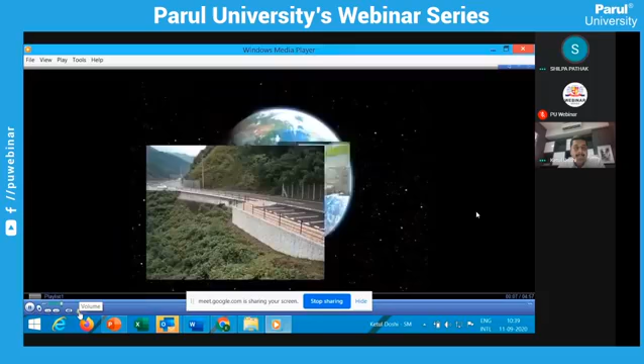Friends, the next video we will be publishing is the pure manufacturing process inside the plant - how the concrete is getting manufactured, how it is being transported, how it is being poured, and how the steam curing is getting done. So we'll see the entire video now.

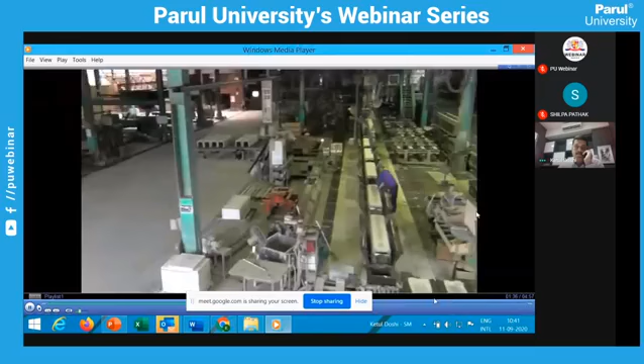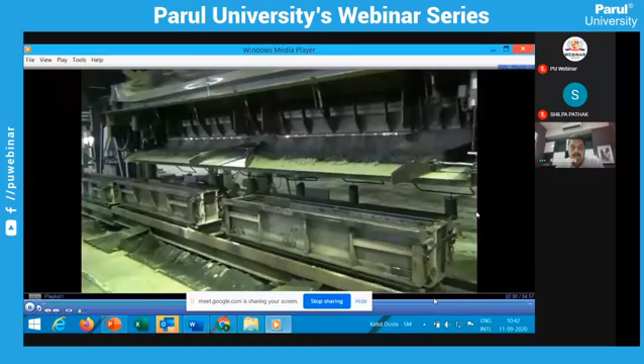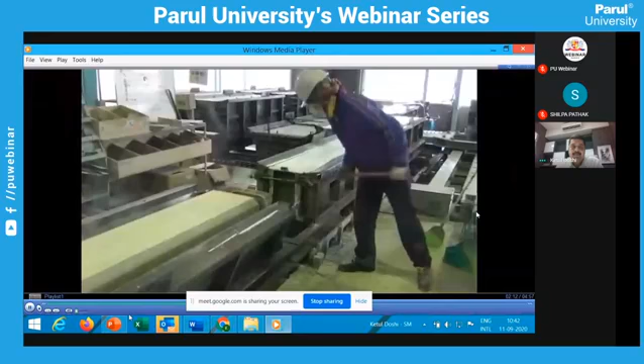This is how the reinforcement cage has been placed inside the mold. Now the concrete is being poured. After pouring the concrete, it is transported to the steam curing chamber. The benefit of doing steam curing is that the concrete will faster develop its strength.

You can see the finishing of the product. It is as good as a glassy finish. So aesthetically, the product will look much better.

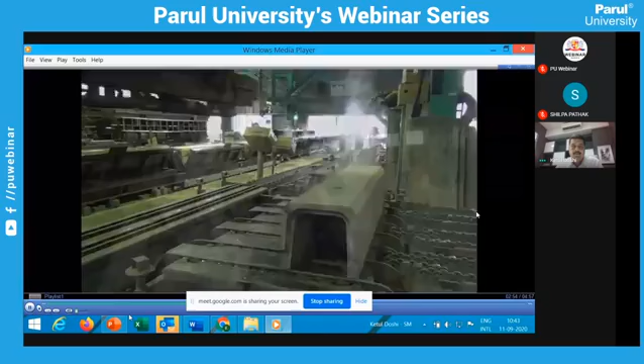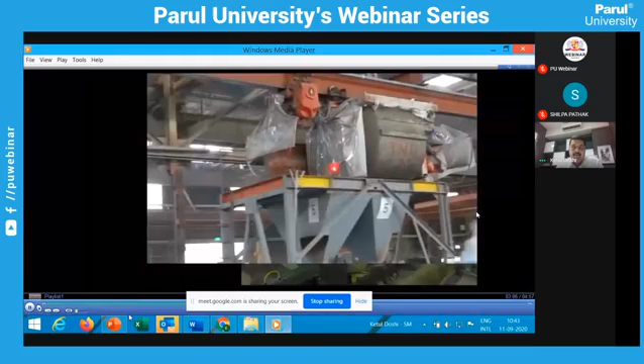These are box culverts, made in a fully controlled automated batching plant. You can see the quality of the concrete - it is totally free flow. We call it self-compacting concrete. No vibration, no compaction is required.

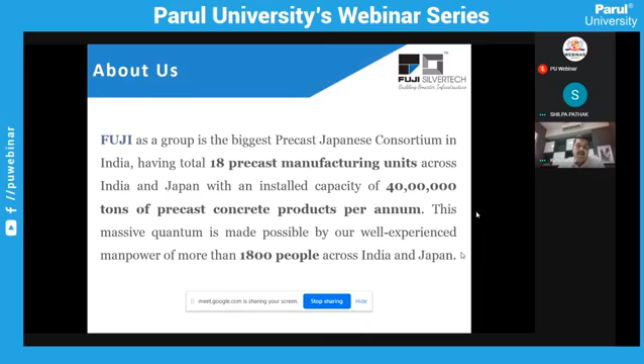Fuji is a consortium of several Japanese producers - Taki, Veda, Fuji. Silvertech is an Indian partner. It is a joint venture between Fuji and Silvertech.

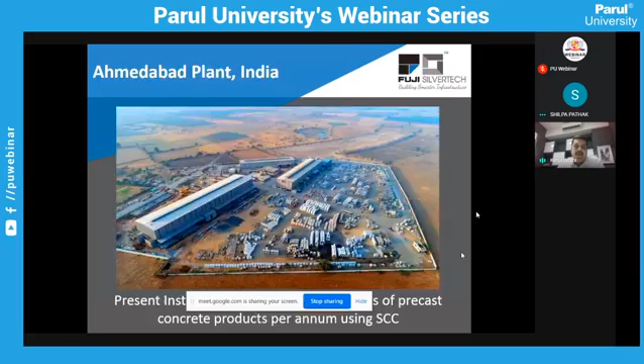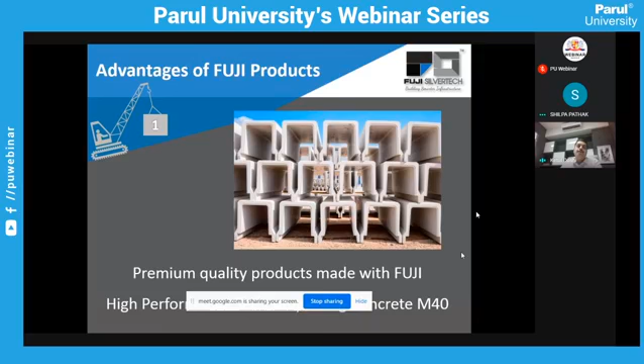The products we manufacture use high performance self-compacting concrete, as mentioned earlier. The grade of concrete is M40, that is cylinder strength. But in India, we use cube strength - the cube strength will be 50 MPa.

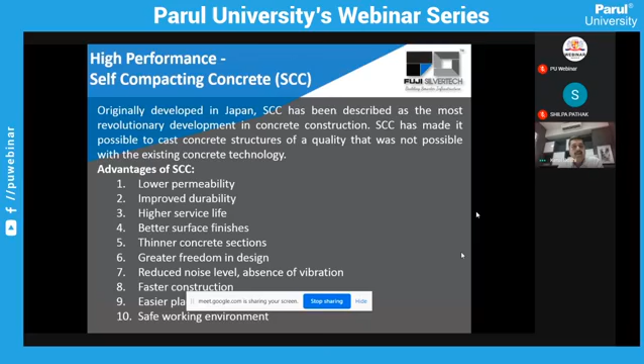Now, the purpose of why we utilize this kind of concrete - the cost of normal concrete versus SCC is almost 25 to 30% higher. But the benefits are there. The advantages with SCC: it gives lower permeability, so no ingress of moisture, chemical or adulterated material will go inside. This improves the durability of the product and gives higher service life. The finishing will be very beautiful - as good as a glassy surface. It will speed up our construction activity as the material is readily dispatchable and installed at the site.

The entire production facility is being controlled by Japanese people. We have a staff of more than 250 Indian people, including ITIs, civil engineers, and diploma engineers who control the entire production, but the entire thing is supervised by Japanese people.

The fourth product is a box culvert. While going on highways, you can see small bridges or minor bridges across the road. These small bridges are manufactured using box culverts. These are ready-made box culverts - you can place the box culvert and the traffic can move on immediately.

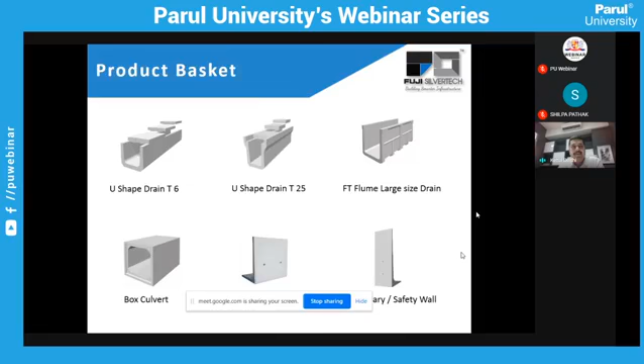Then we have retaining wall and boundary wall. All these products will now be briefly described one by one. The first one is the U-shaped drain T25.

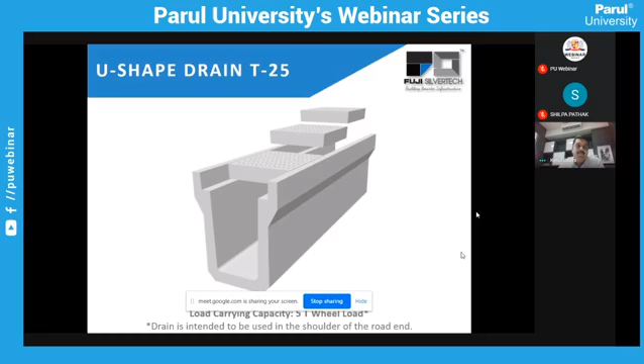This is designed to carry a load carrying capacity of 5 ton wheel load. These are normally placed on the shoulder of the road. This is a load distribution of 25 ton vehicle load, accounting for a 2 axle load, meaning a 10 ton axle load will accompany.

For one axle, there will be two wheels, so one wheel load will be 5 ton. This is a load bearing diagram, and accordingly the reinforcement design is done. The size of the product varies from 300 to 1200, available at every 150 mm gap - 300, 450, 600, and so on.

During manufacturing, I'll brief you regarding the manufacturing activities. We are using single source raw material. At most sites, raw materials vary from batch to batch because of commercial and rate implications. At our place, for the last more than 4.5 years, all raw materials are single source raw material.

Whether it is cement, fine aggregate, coarse aggregate, admixtures that we utilize, or reinforcement, these are all single source raw material, which helps us get a consistent product and product quality to all our customers.

The water that we utilize is RO water - the same RO water that we drink at home. This helps control chloride limitation, because chloride causes corrosion in concrete over a longer period. So small minor points are also taken care of.

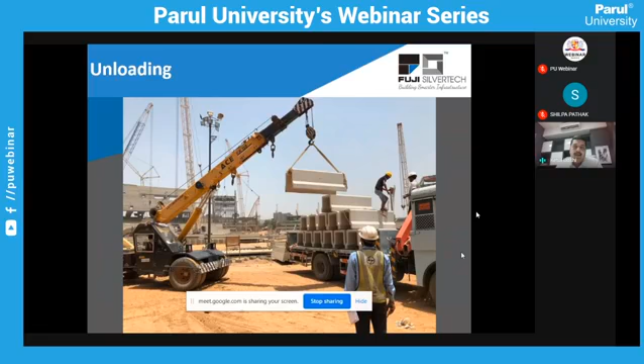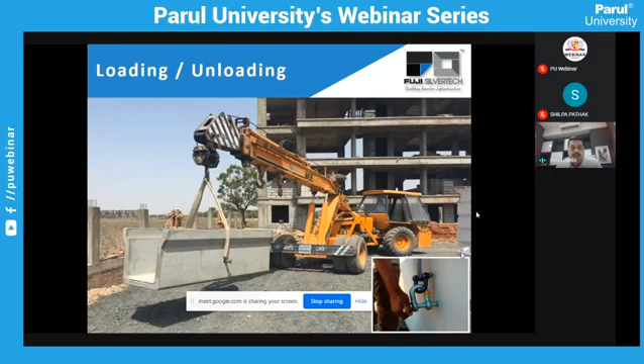This is how, after 14 days of product manufacturing, we transport the product to site. These are unloading patterns. After unloading, we need to place the product at the required location. For that, you can see the D-shackle, a small kind of hook, which is inserted into the product. There are inserts available in every product at the center of gravity where the product remains stable, so the product gets lifted by Hydra.

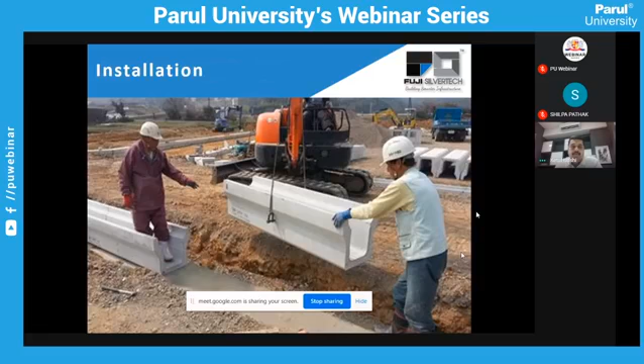This is how it gets placed on the PCC. In precast, joinery mechanism is very important, because at construction site you can see these are all monolithic units, so transfer of stresses is uniform. In precast, this kind of joining mechanism has to be proven, otherwise there is a chance of failure.

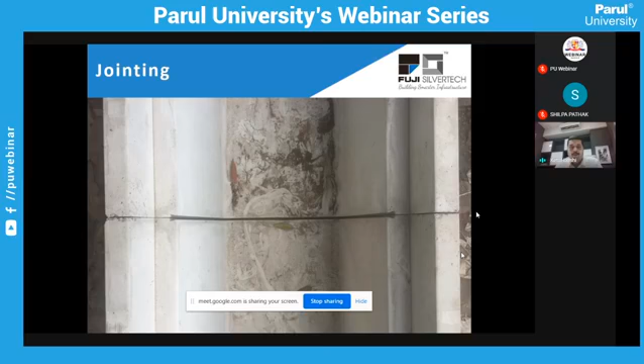This joining mechanism we follow as per Japanese code, JIS - Japanese Industrial Standard - because these products are not yet in the Indian standard. So it is a proven thing, mentioned in their code. This kind of joining mechanism is there - this is the shape you can see, the typical groove. These are to be filled up with cement mortar, normal cement mortar.

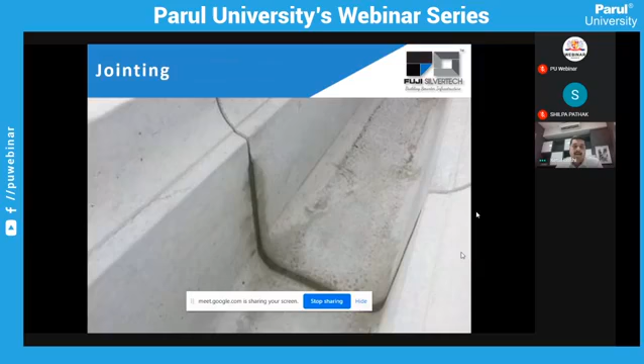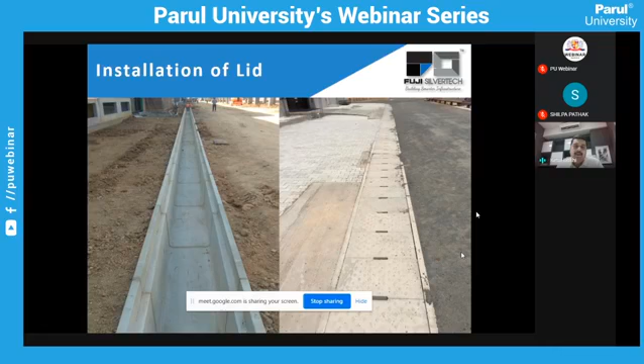The finishing is done. You can see the entire channel is ready. Now what is the difference? If we are going to cast at site, then per day we can cast at least 40 to 50 running meter maximum. If it is precast, then one gang of 4 people and one Hydra can install at least 100 to 120 meter. If I can deploy 3 such teams, we can get 350 to 400 meter every day. So that is the difference.

You can see the finishing of the product. This cannot be achieved at site. The life of the product, you can say more than 50 years. There is no maintenance cost, no spalling of concrete. These are installed products at unit Maruti Suzuki in Gujarat, Bechraji plant.

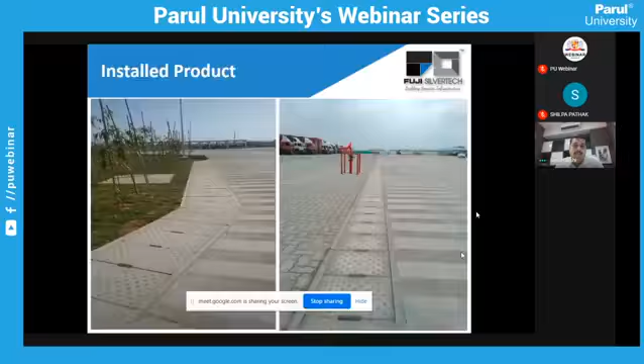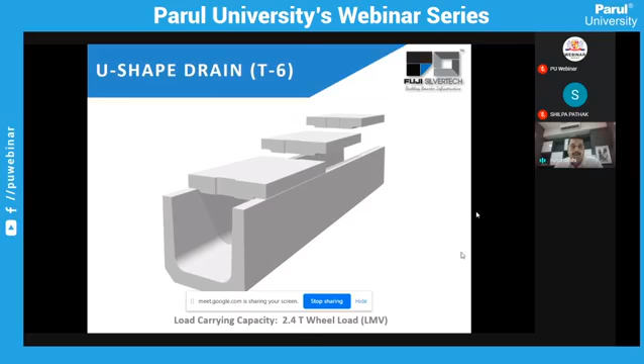These are another variety of drain, T6, same methodology. Many times the drains are installed away from the footpath, where the top surface is used for manual movement, that is pedestrian load. So these are a little bit lighter with low reinforcement. Same size parameters, 300, 450, 600, 750, the same methodology.

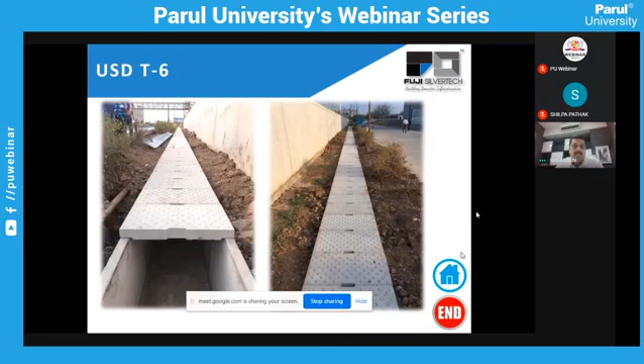Most industrial and government projects are now following this kind of practice. Instead of doing site casting, they just procure these kind of precast products. These are being installed away from the road. This is a photograph of Asahi Glass, near Mehsana.

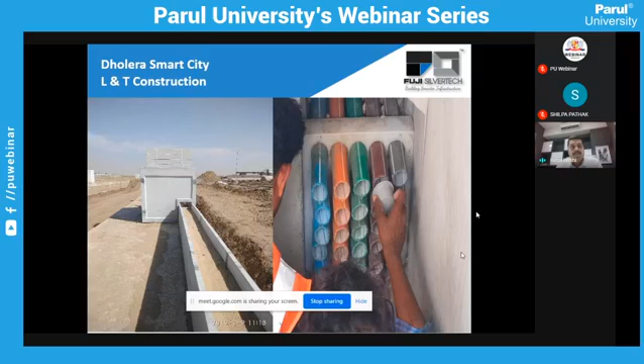These are cable trench. Entire infrastructure activity is almost completed. Most, about 80% of the site, is also completed in terms of roads and infrastructure. It is on the handover.

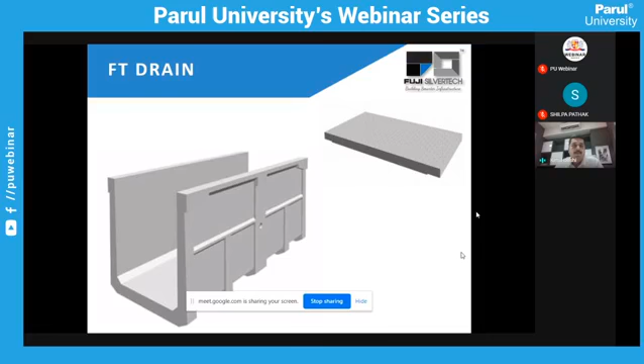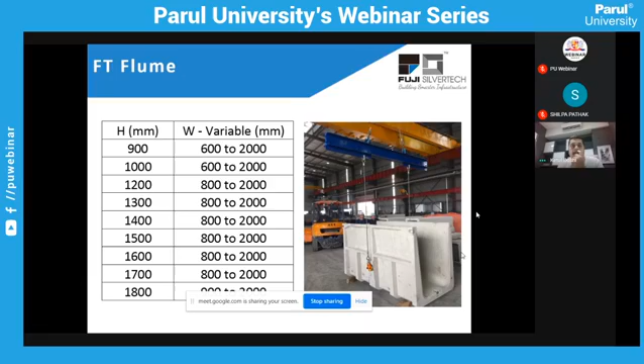If you see the product from an engineering point of view, that is an interesting subject. Most U-shaped trench we have seen is a single type of structure. Now this is a tie kind of structure, a tie beam. The load is getting distributed between column and beams. The rib structure is there, and in between the slab is very thin. So it's a pure engineering product, and the cost complications are very less here.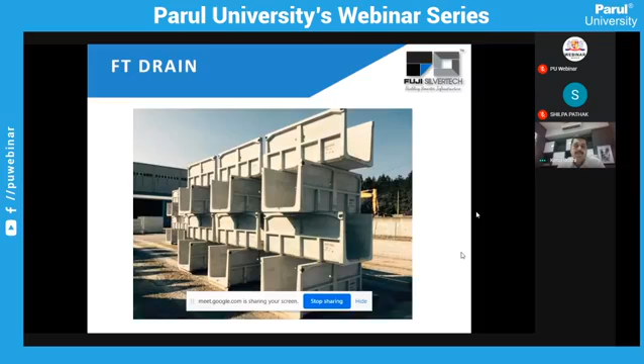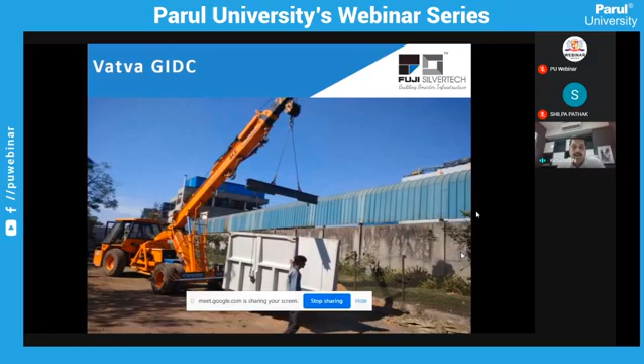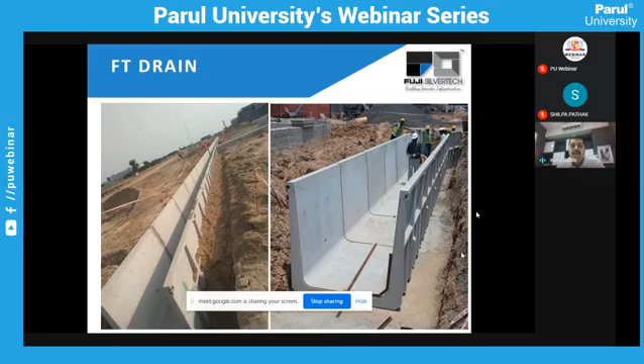On the side of the road, it is being installed. The top surface is designed to take a 4-ton load. How the product is getting unloaded at site, how it is being placed, transported from the stocking yard to installed places—this is the installed product. You can see it's a 1.5 by 1.5 meter size drain. You can see the finishing, line, level, everything in a single line. No segregation of concrete, no kapchi grit is visible.

It's a photograph of Zydus infrastructure. Zydus SEZ is there, second part is coming up in Bavla. There 10 kilometers of such cable trench has been installed.

One industrial unit in Sanand, Secure Meters, where these are being used for cable trenches, and the inside arrangement has been performed by the site people. You can see the person can move inside the trenches for maintenance work of the cable.

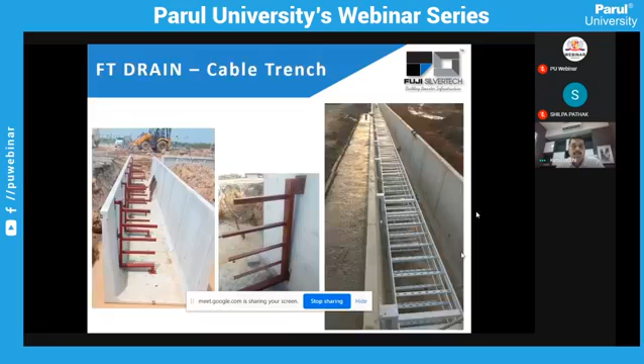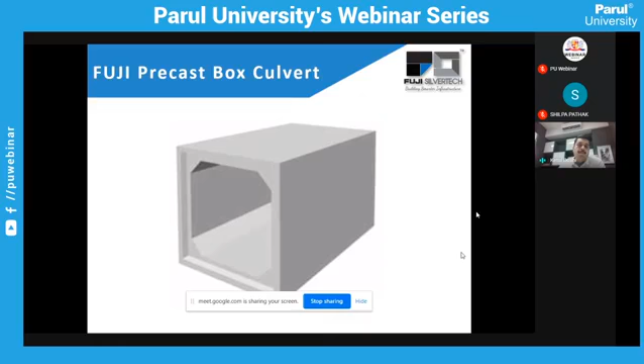Box culvert. Normally box culverts are used at road crossings for heavy traffic movement. Second is for pipe culvert as a replacement of pipe culvert. Third, it is utilized for replacement of minor bridges, with a height of 2 meter or 2.5 meter, these are ready-made box culverts. We are manufacturing the smallest one at 300 by 300, up to 1 meter, 1.5 meter, 2 meter, 2.5 meter. All sizes are available.

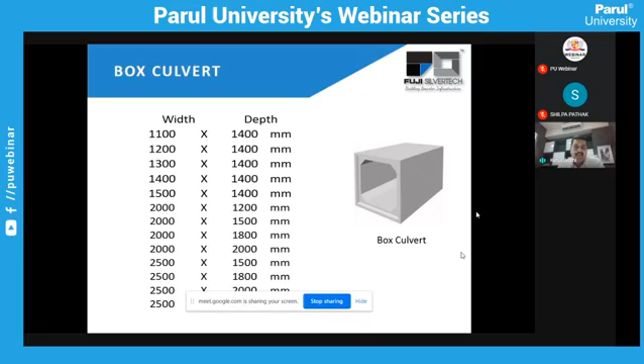This is the actual product. The joinery mechanism—the precast members are manufactured in a very good environment, but the joinery mechanism is also important for transfer of stresses. Now, box culvert is a load-bearing structure. The U-shaped trench, the 3 varieties we have seen, are all non-load-bearing products. No load is coming onto them.

Here the joinery mechanism, you can see it's a male-female groove for proper gripping of the product. That is one. Second, at all 4 corners, the flange plate is available, so these are to be tightened up with nut and bolt. After joining, we can have a grout, and these are to be filled up with cement mortar.

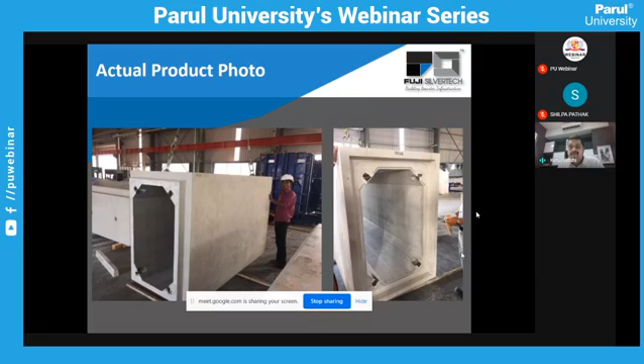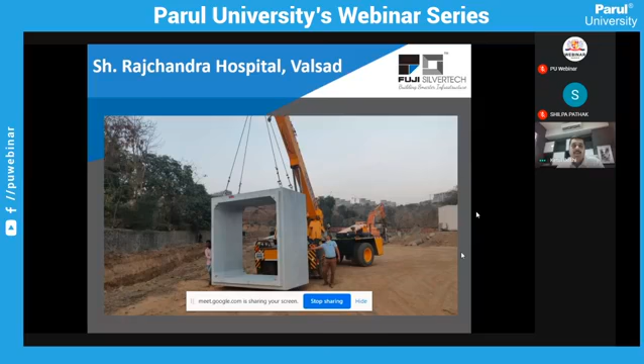This is actual product installed at the site. This is a large size culvert, 2.5 by 2.5 meter. These were utilized as a minor bridge.

We can have inside movement between these 2.5 by 2.5 meter high units. You can see people moving inside. This can be utilized for traffic purposes as well.

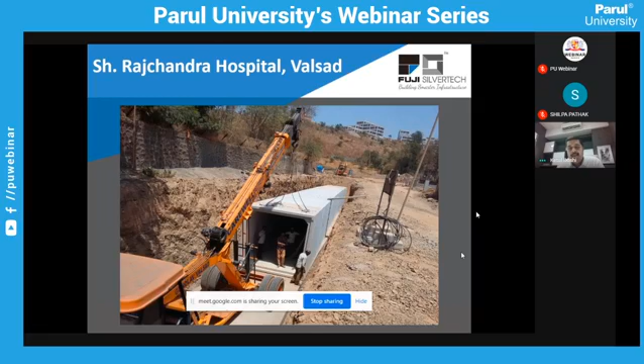Multiple cells we can put. It is the entry gate of the factory and there is a highway. In between that, a small canal is there. So this will work as a small bridge.

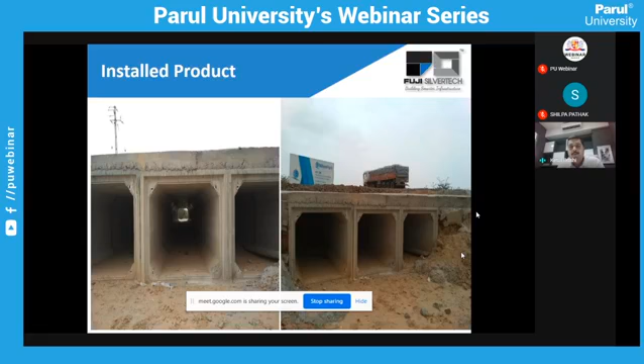Multiple cells we can also put in, adjoining to the box culvert, one over the other. And above that, we can put a small concrete or bitumen layer.

These are earth retaining walls. The walls are being designed to carry a soil burden up to the full of their height.

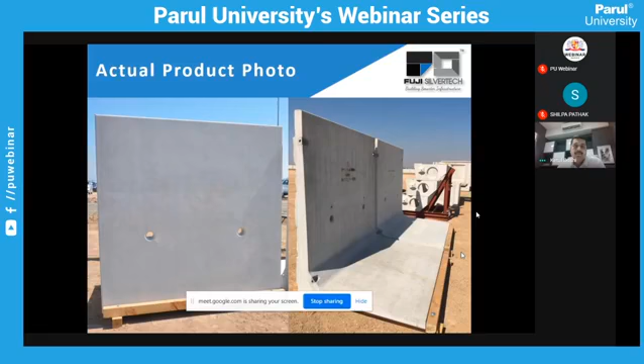These are in L shape, self-stabilized product, just to place on the surface. Different heights are available from 600 mm to 2.5 meter.

Now, where is it utilized? The main core question for yourself is where retaining walls are getting utilized. You can understand if the highway is on a higher side and your plot is at a lower level.

Now, if you construct a building, then in all rain, the water will get flooded. The entire project will get flooded. The site activities will get stalled. So we require to increase the level of the plot. To do that, we need to fill up the soil inside the plot. To retain that soil, a retaining wall will be required.

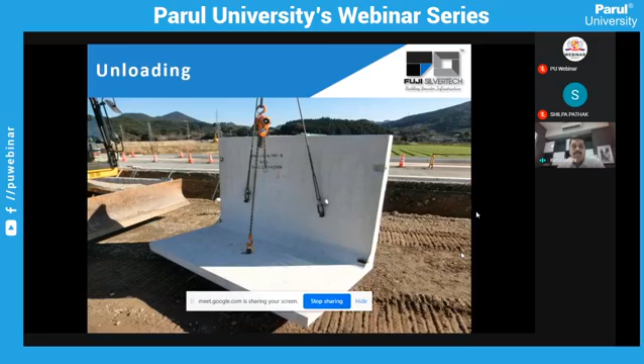How the product is getting lifted, how it is getting joined. This you can see how the product will look after installation, one over the other unit. Now this entire L shape will get filled up with soil to the top of the height.

After looking at the product and everything, the first question will always be in the mind of the user: that the product will be costlier, because it is not that we have to install it ourselves in our own house. These products are used at a site where the contractor is doing the work and will move out of the site, so he is not responsible for whatever activities he has done afterward. So we have to be cost competitive.

I can give a small example. If the cost of site casting is 100 rupees per running meter for any product, then this ready-made product is going to cost you 95 rupees per running meter. So in cost comparison, this will be cheaper.

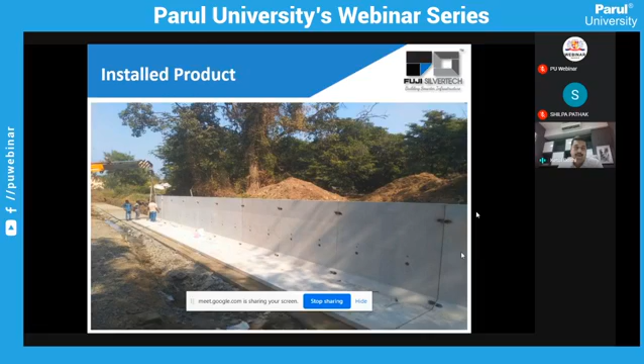And besides this, there are several advantages, what I have already discussed. These are several government projects where we have been approved and are supplying the products.

R&B Gujarat, we are supplying. The new railway project, the Dedicated Freight Corridor (DFCC), a new line coming up, we are supplying there too. Dholera Smart City, Surat Smart City, GIDC - most of the new GIDC drains are coming up with precast only. They have removed the word 'site casting' from all the tender work.

DMICDC, that is Delhi Mumbai Industrial Corridor. CPWD, Central Public Works Department, we are supplying. In PWD Maharashtra, we are supplying.

In industry, these are our first customers. Because after getting success in the industrial market, we expanded our facilities and now we are approaching government clients. So in the automobile sector, we are supplying to Maruti Suzuki Pan India, not only in Gujarat. Most of our products are getting dispatched to the farthest locations like Hyderabad, Chennai, Delhi, Maharashtra, the entire region.

Chemical companies where we are supplying - UPL, Aarti - these are all in the vicinity of your college. In Bharuch, Dahej, most of the industrial sector we are supplying.

Meghmani, Thirumalai Chemicals, GSEL. Several units came up in Sanand - Coca-Cola we supplied, Amul Dairy we supplied in Anand, PepsiCo project in Bharuch.

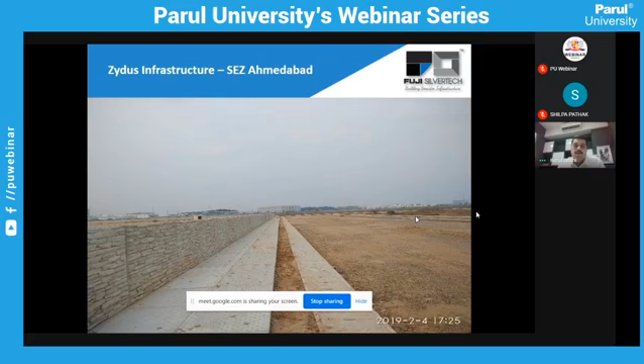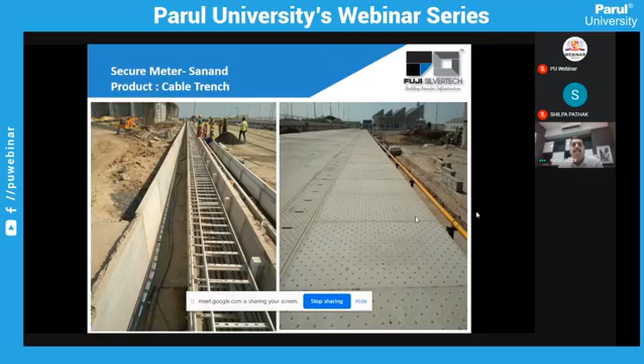There is a Coca-Cola plant, Hindustan Coca-Cola Beverages. We supplied in 2017 - entire drains, box culvert.

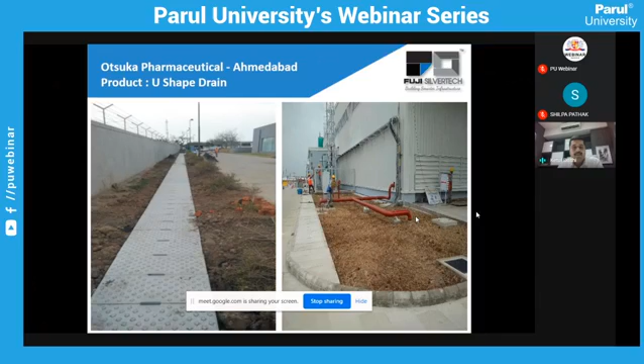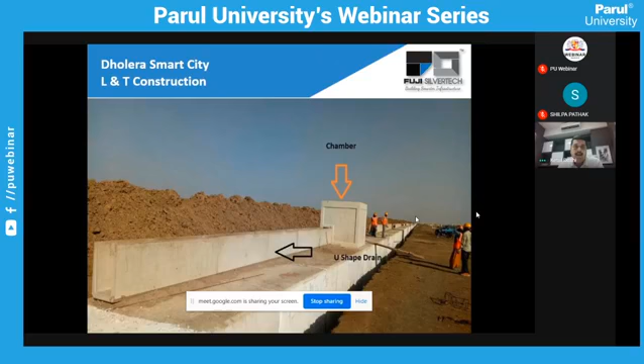Most of the customers are repeat customers, and after getting a good experience of the product and services, the same is getting utilized at further locations like Vizag, Hyderabad and Chennai. Also we are supplying Surat Smart City cable trench work, L&T Dholera for cable trenches. Box culvert also we supplied for utilities and stormwater drain both purposes.

This may be known to everyone - this is Ahmedabad Khau Gali, Law Garden. Now it has been totally newly constructed and named as Happy Street. Here we supplied stormwater drain and cable trench both.

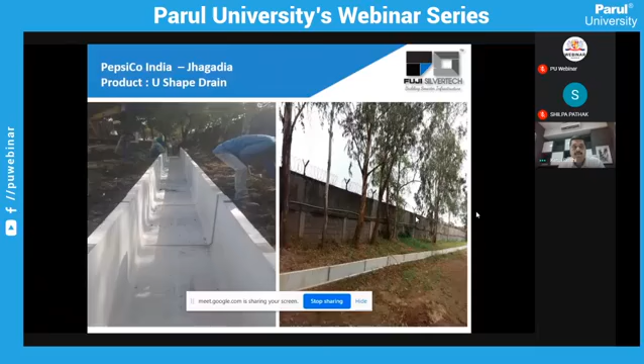PepsiCo project in Jhagadia. Colgate Palmolive we also supplied in Sanand unit.

For retaining wall, everything is to be filled with soil to the top of the height.

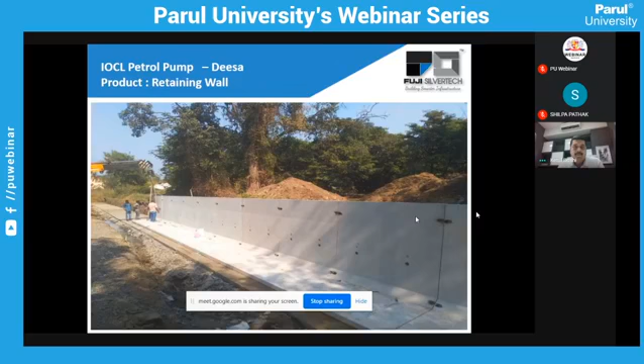Ashanti Mandir project near Valsad. Claris Pharmaceutical near Bavla, Bagodra Road.

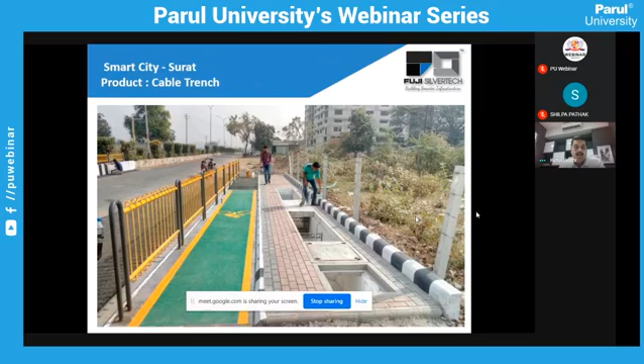Surat Smart City, what we have already seen. This is Maruti Suzuki Bechraji. Vatva GIDC - entire project has been completed, almost 12 kilometers of trenches we supplied.

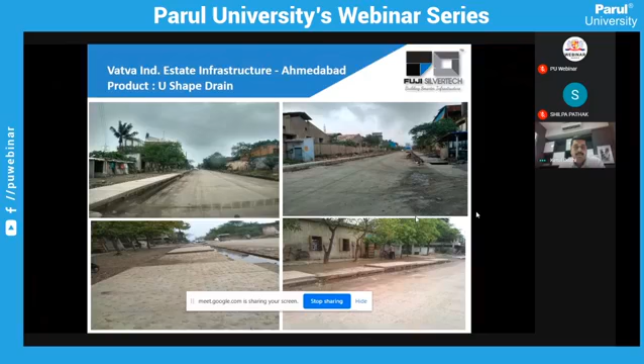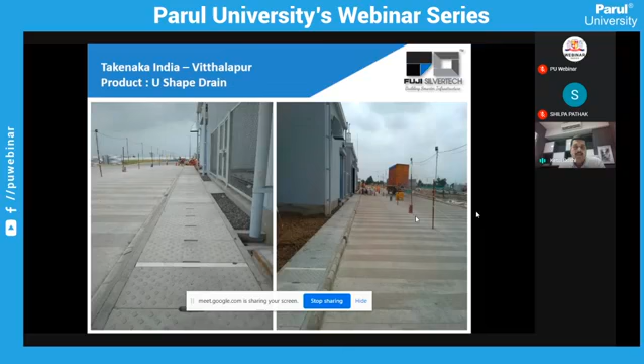This project we designed and supplied both. Unicharm factory, a Japanese company in Sanand. Takenaka, a Japanese contractor, is there. Toyota Forms, where we supplied this boundary wall, Reckli finished boundary wall.

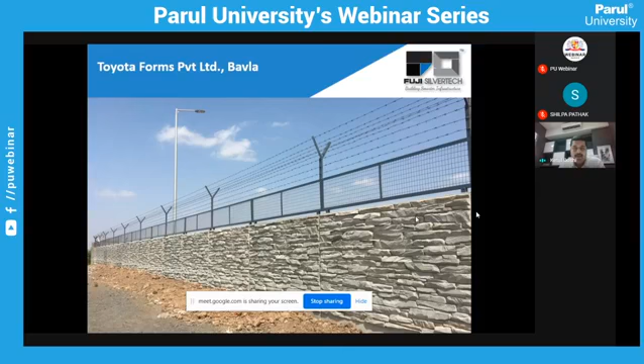Aesthetically it will look fabulous. This is the entrance gate. Box culvert for heavy traffic movement.

Retaining walls - Nivea we supplied in Sanand. Asahi Glass for these cable trenches.

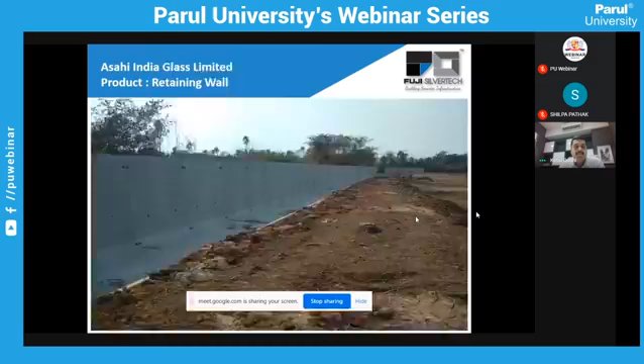At crossings, this kind of heavy U-shaped trenches - in UPL we are supplying for more than 4 years now, more than 10 units we have supplied.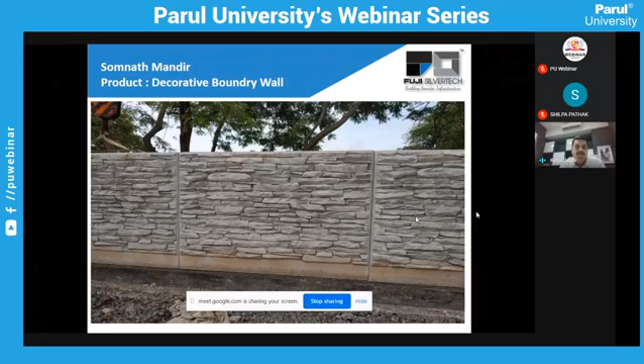Somnath Temple, the most famous place. The Somnath Temple entire rehabilitation work, or entire new development work for the entire parking - we supplied this boundary wall for almost 4 kilometers, plus stormwater drain, plus cable trench. The appearance of this has got changed with this kind of wall.

So this is all the presentation we discussed so far. Now, if you have any query, any doubts?

Ketul sir, related to manufacturing, if you enlighten us on a few things about manufacturing, then for 5-10 minutes we can have that also. If you want to say something, because what precautions or how the manufacturing is actually done, that is my question to you. Yes.

Regarding manufacture, first we source out certain material. After undertaking several trials and testing of raw materials like fine aggregate, coarse aggregate, that is fineness modulus, so what we are taking, the aggregate quality, cement - most of the brands we tested and finalized one or two brands to get the consistency. After getting raw material inside the factory, they undergo testing as per the IS methodology.

At least 5 samples we are taking per day in different batches from the raw material, to get the actual result of every raw material with a small standard deviation that is permissible. Second, the entire batching plant is totally automated. The mix design that we follow is as per Japanese standards, because they are already performing at their Japanese unit. Regarding pouring of the concrete, it is transported in two varieties - one is a hopper.